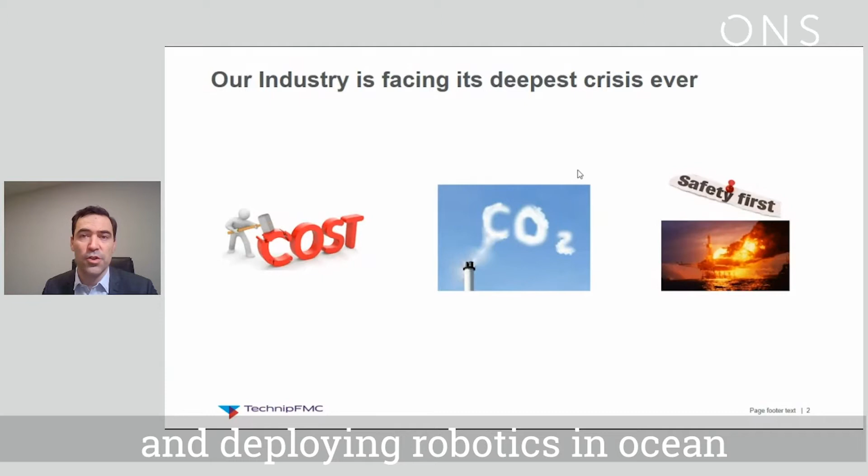We also saw that the pandemic highlighted how oil and gas production relies on human presence offshore. At Cybernetix, we've been developing and deploying robotics in ocean environments for the past 30 years, and we are convinced that robotics can be used to address these critical issues. In addition, the industry needs service providers able to bring the quality level that we require.

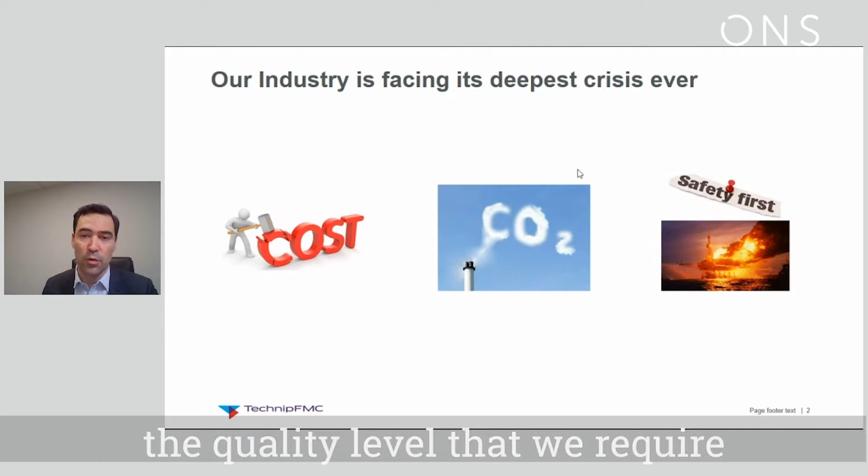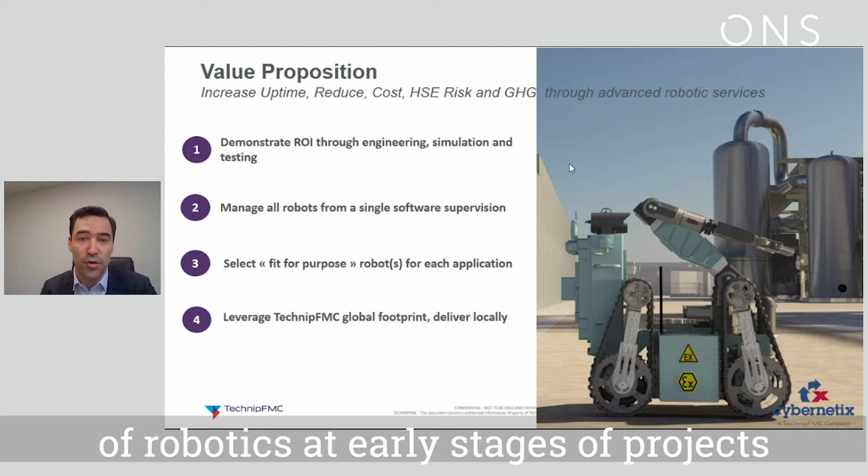At Cybernetix, our value proposition is to support our clients in enhancing the performance of their assets through advanced robotics. This value proposition relies on four pillars. First, we like to demonstrate the benefits of robotics at early stages of projects. We developed very specific engineering, simulation, and testing capabilities on that front.

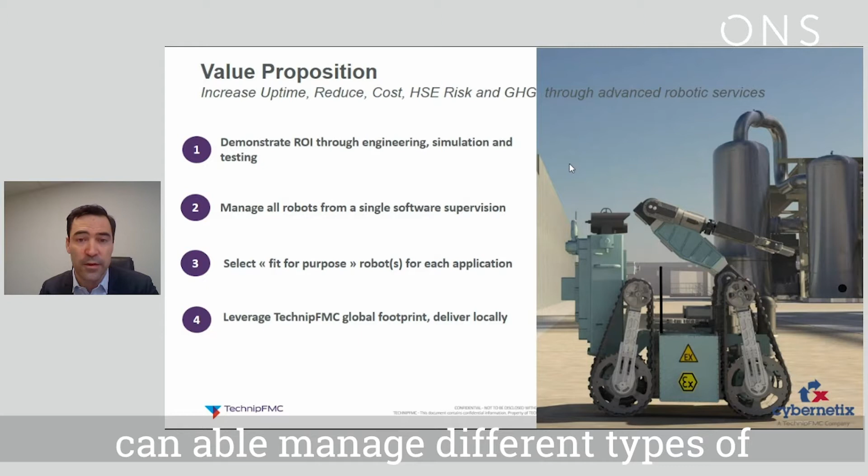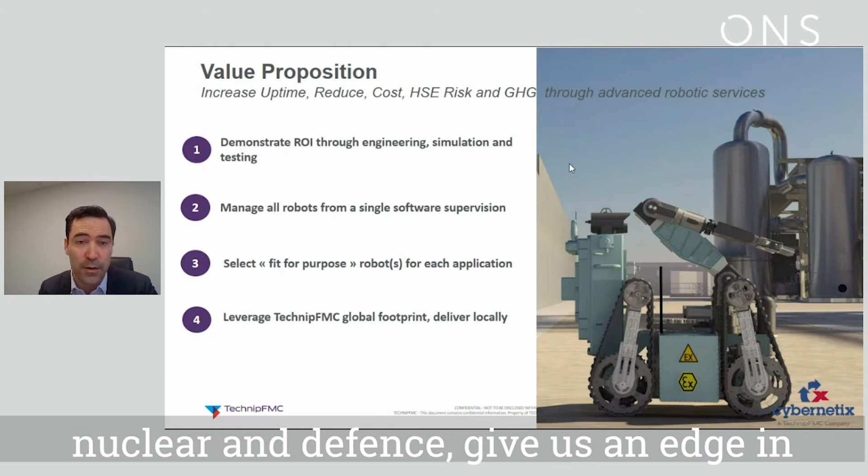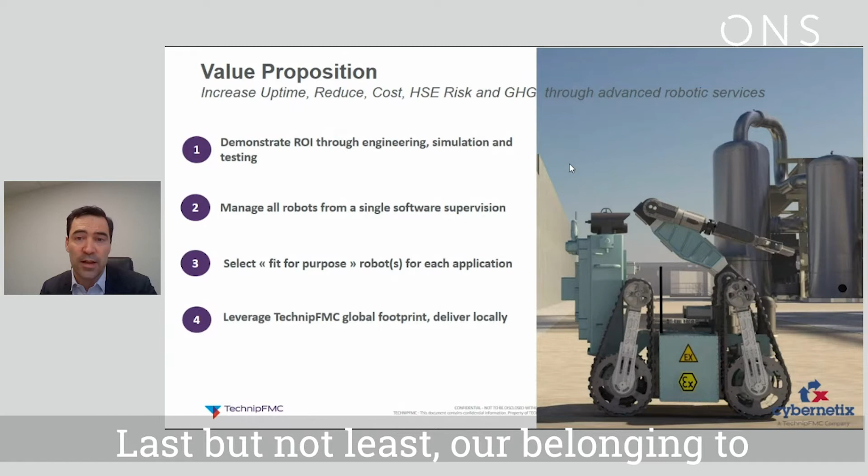We also developed internally our own software supervision over the past 15 years. This supervision can manage different types of robots depending on the applications. Our 35 years of experience in industries like oil and gas, but also nuclear and defense, give us an edge in selecting the right robots depending on your needs and applications. Last but not least, our belonging to TechnipFMC gives us a global footprint, which allows us to deliver locally to our clients.

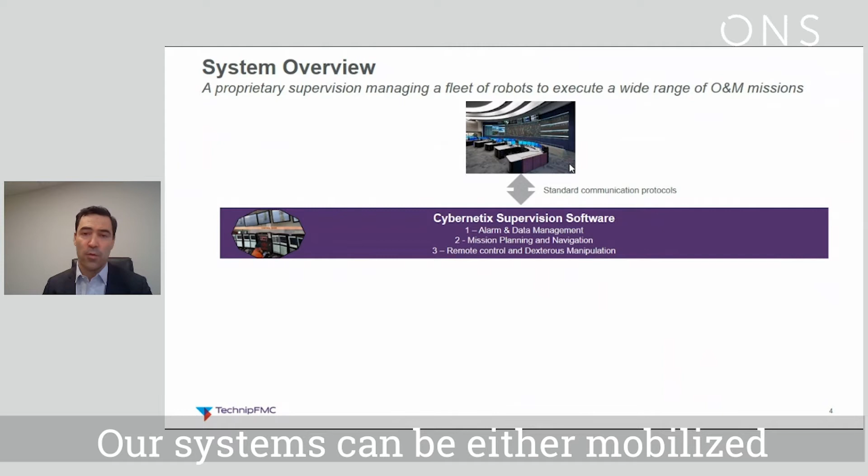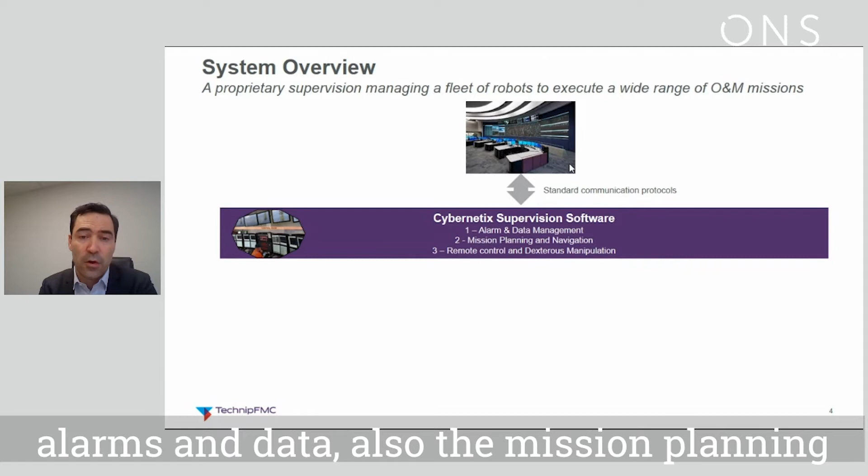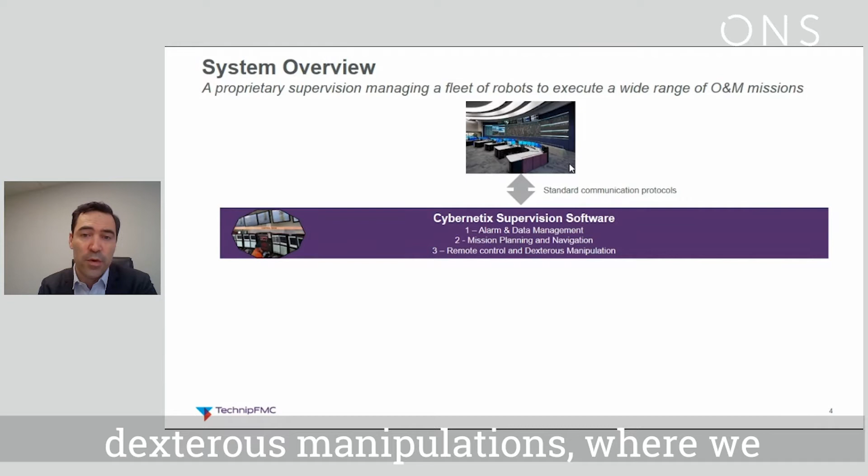Our systems can be either mobilized on a call-off basis or mobilized for longer permanent periods. The heart of the solution is our Supervision Software, which manages alarms and data, but also the mission planning and navigation of the different robots. It also enables remote control and dexterous manipulations, where we've developed very specific technologies for the nuclear industry. It complements a control center very well because we use standard communication protocols.

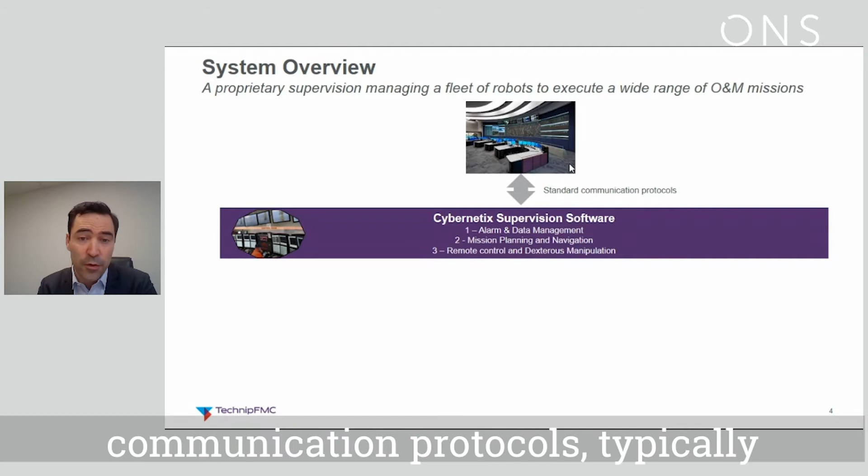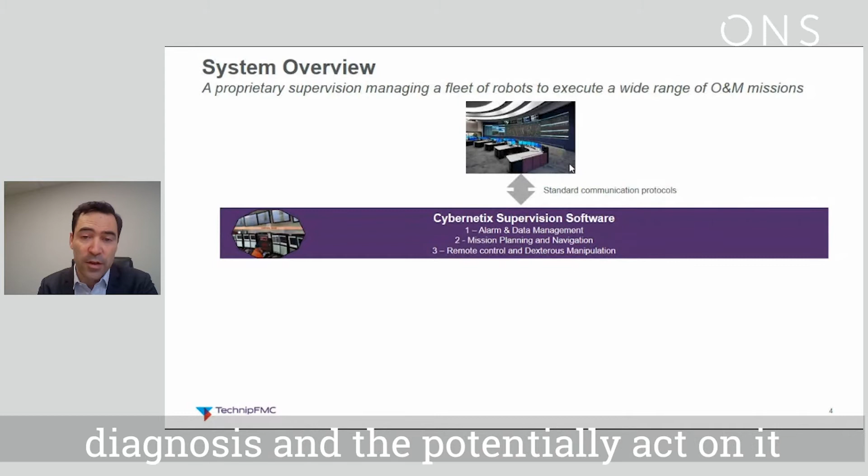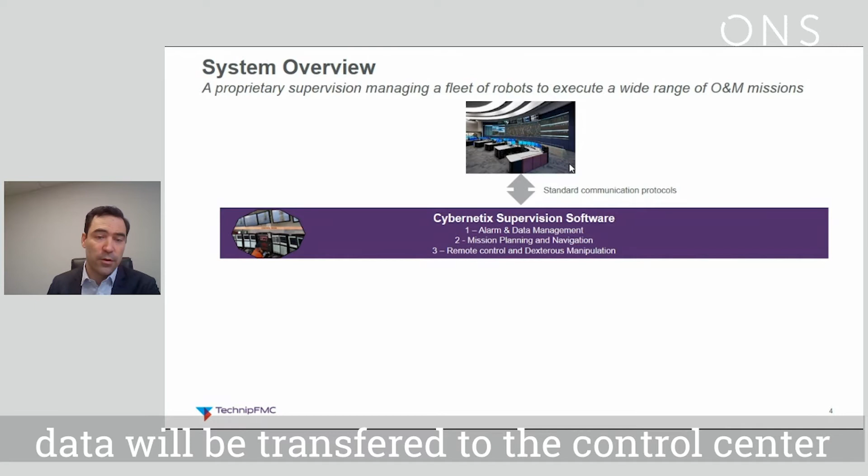Typically, if you have an alarm for a leak, the control center can share the alarm with the supervision software, which will trigger an inspection by a robot to validate the diagnosis and then potentially act on it. At the end of the mission, a report will be automatically generated, and the useful data will be transferred to the control center.

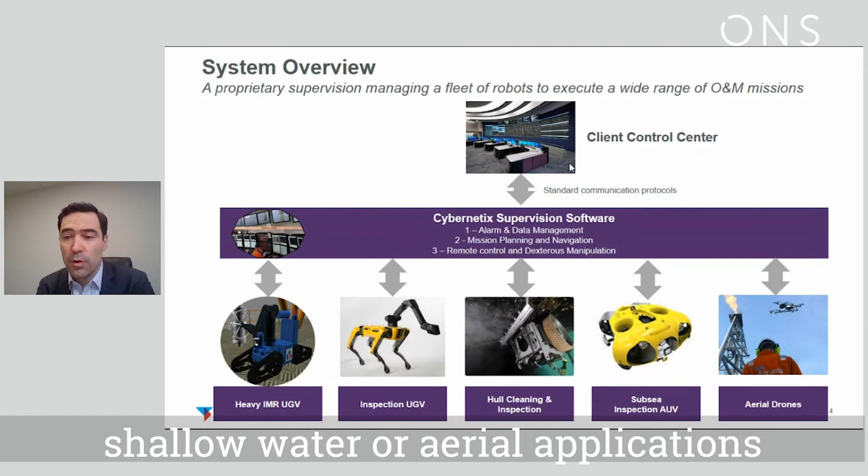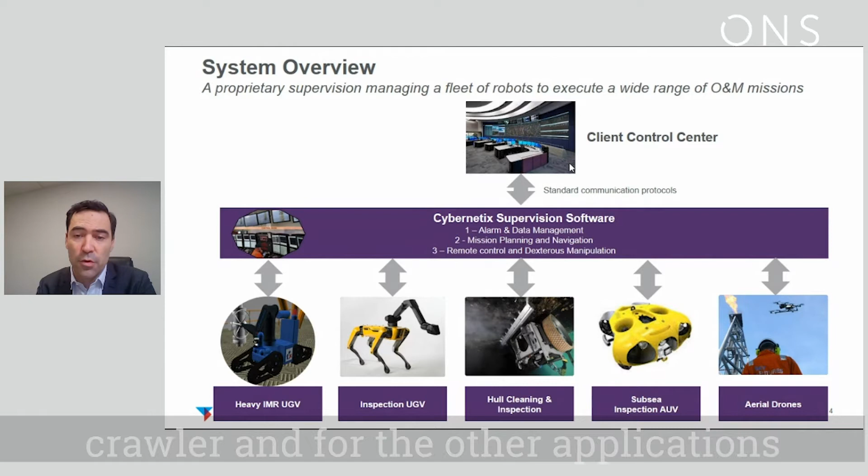We can connect any type of robot to the supervision system, be it for ground, shallow water, or aerial applications. We developed internally our own heavy IMR crawler, fully ATEX, as well as a hull cleaning and inspection crawler. For other applications, there are technologies in the market that we select depending on the applications and connect to our supervision platform.

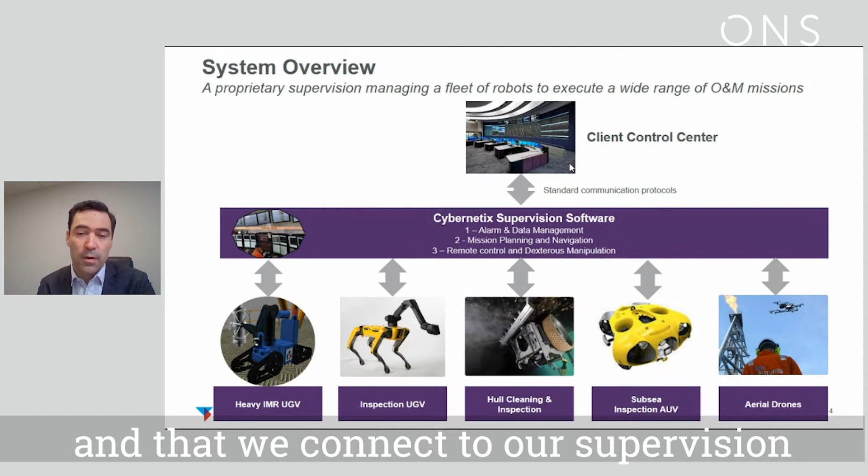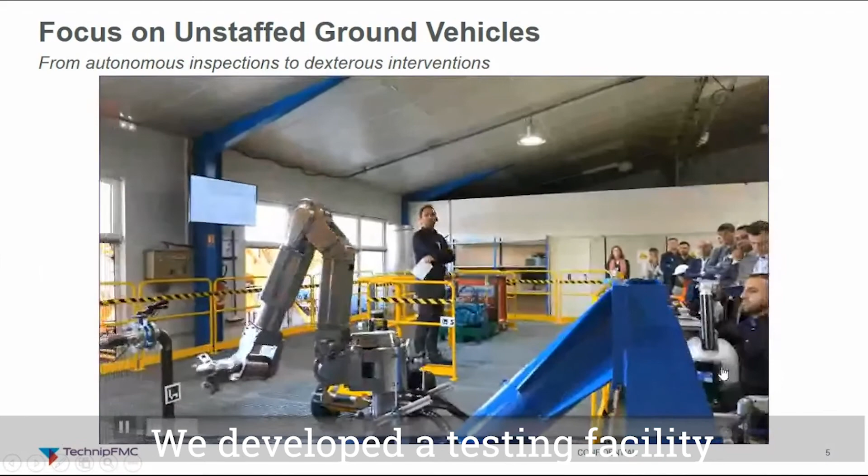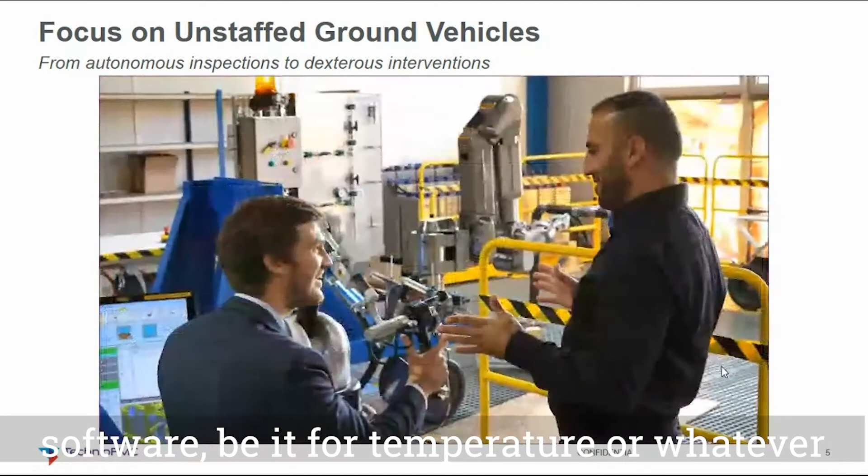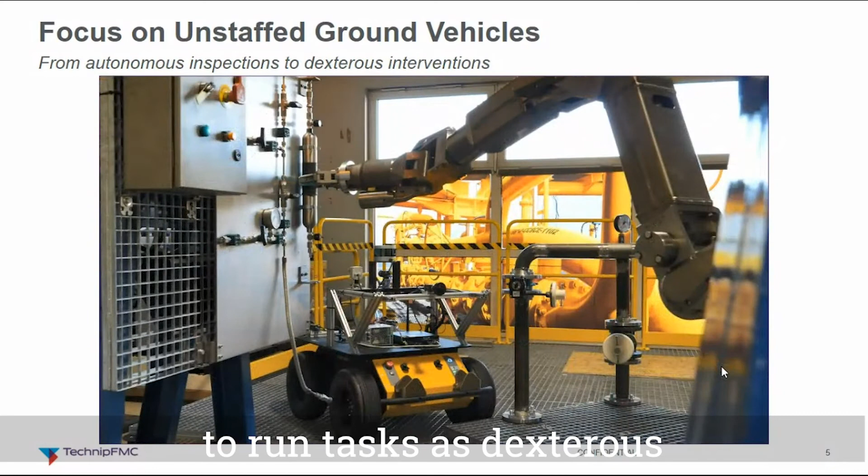So let's focus now on ground vehicles for a moment. In 2019, we organized an event where we demonstrated to clients our capabilities in terms of running autonomous inspections and dexterous interventions. We developed a testing facility, and now have an outdoor one as well, where we demonstrated our capabilities to run autonomous inspections through our software, be it for temperature or whatever needs to be checked. Clients also experienced our technologies in terms of dexterous manipulations, typically to run tasks as dexterous as gas sampling operations.

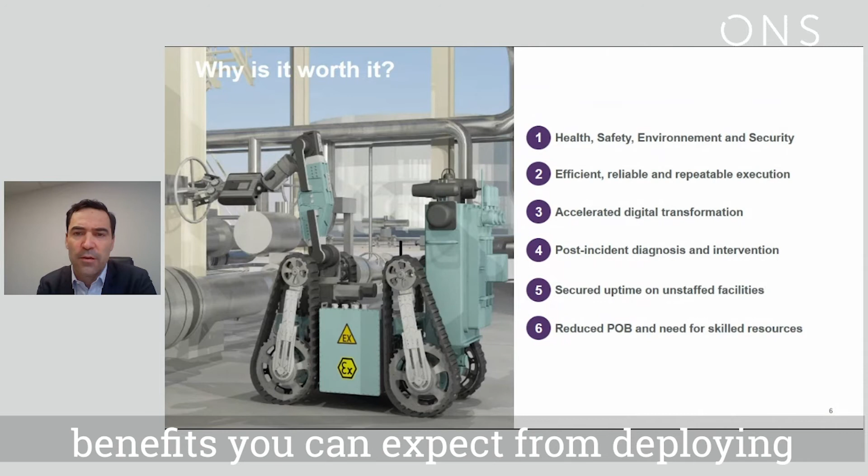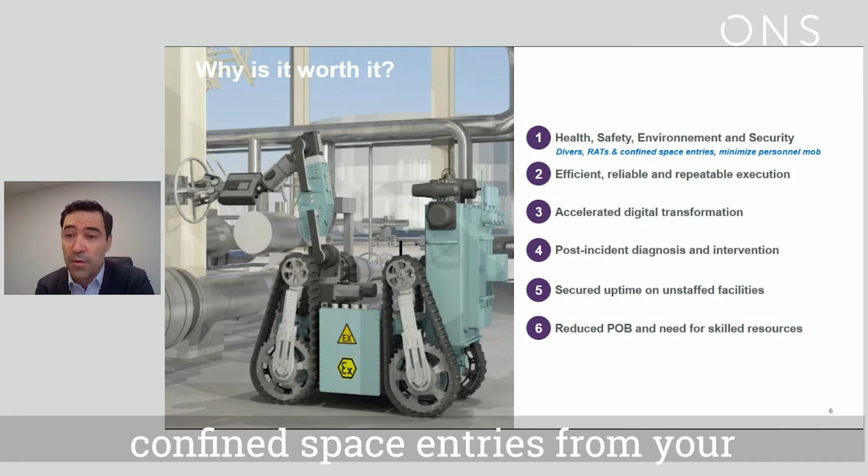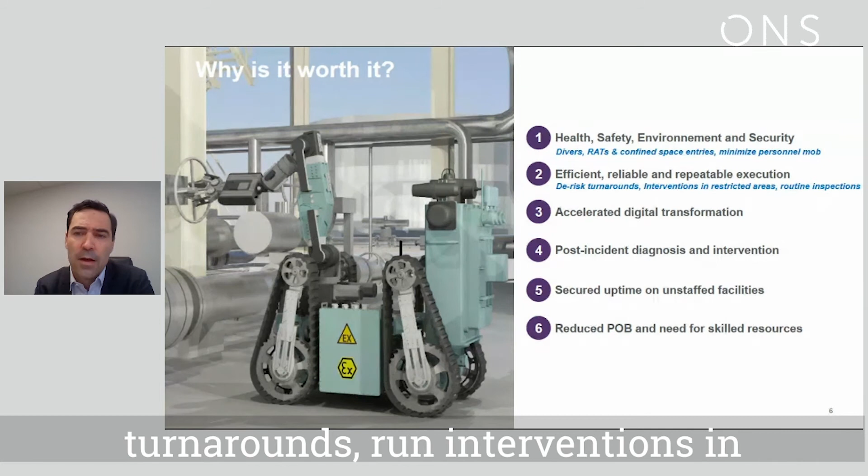So as a summary, what are the benefits you can expect from deploying robotics on your projects? First is obviously related to HSE: you can remove divers, rope access technicians, or confined space entries from your operations. You can run your operations in a more efficient, reliable, and repeatable manner. Typically, you can de-risk and shorten your turnarounds, run interventions in areas restricted to humans, or automate your routine inspections.

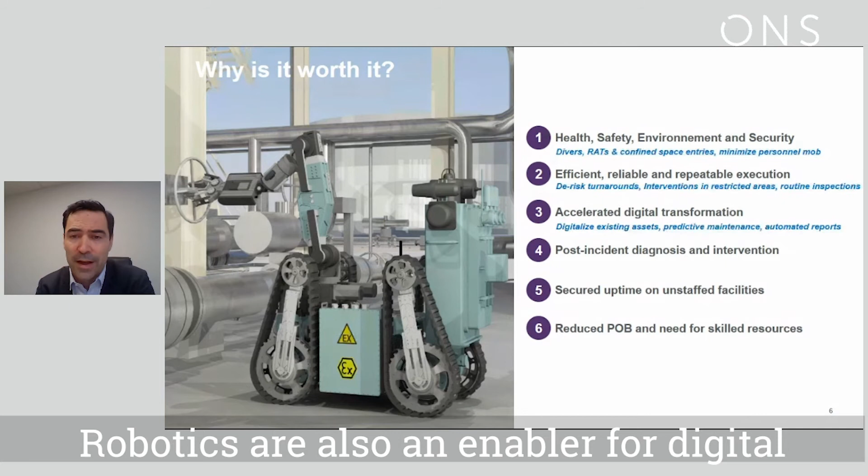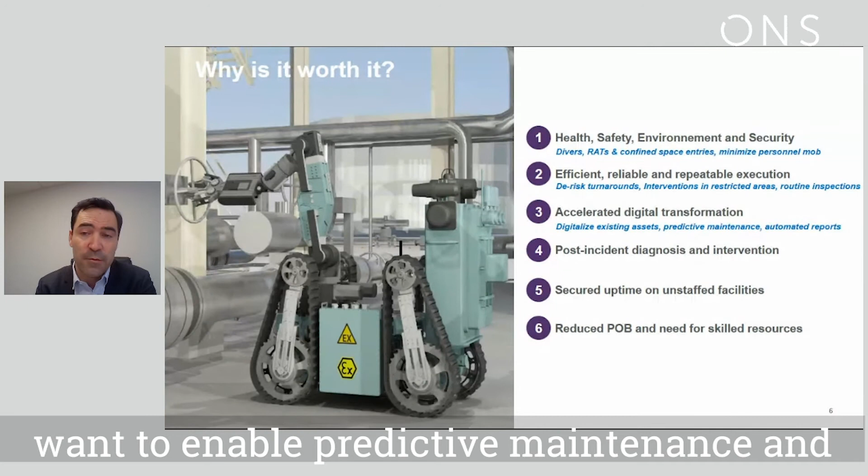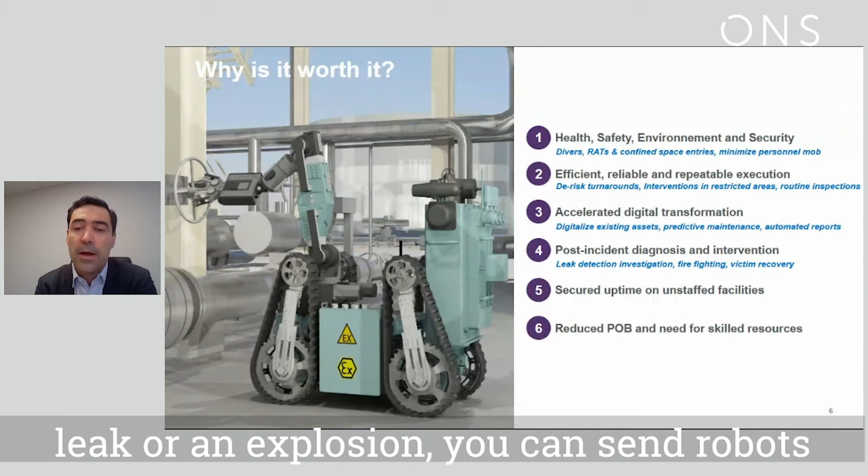Robotics are also an enabler for digital transformation. You can use them for digitalizing existing assets, typically where you may not have all the sensors you want, to enable predictive maintenance and automated reports. Post-incident intervention is also an area where robots can be very useful. Typically, if you have a leak or an explosion, you can send robots instead of sending people. Robots can be used for firefighting or even victim recovery.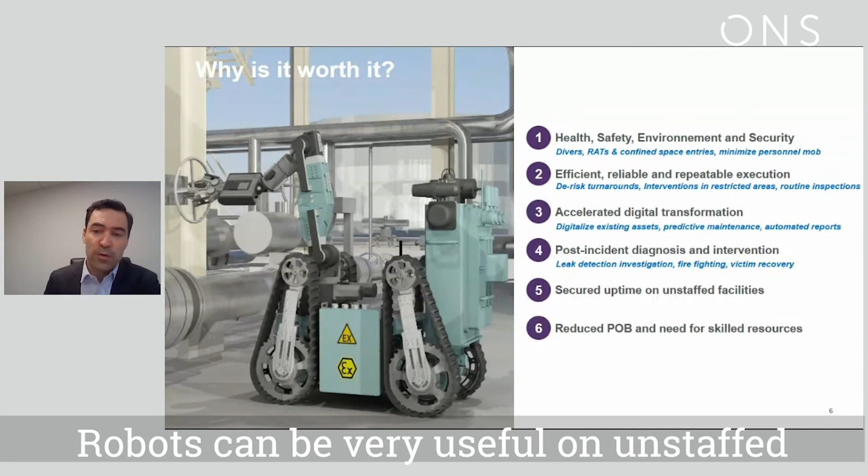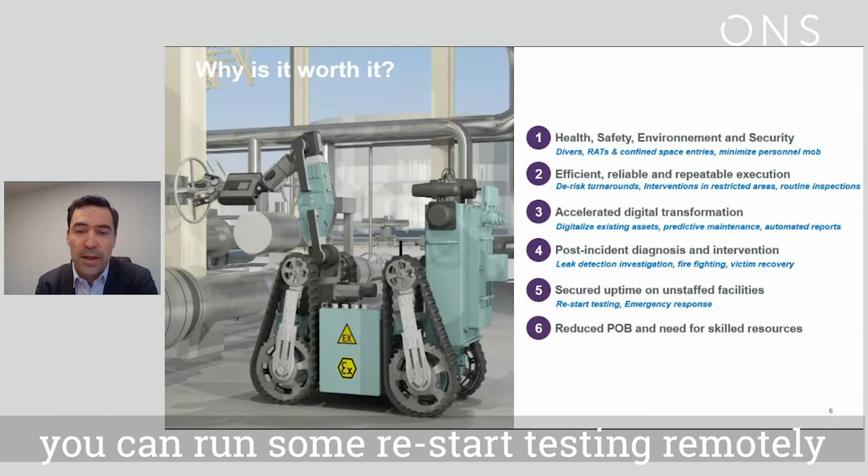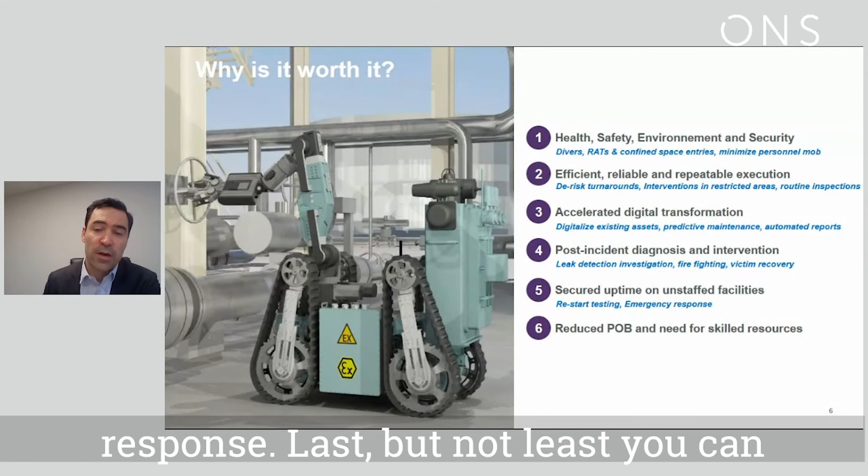Robots can also be very useful on unstaffed assets to secure your uptime. If you have an unplanned breakdown or shutdown, you can run restart testing remotely and understand what's going on, potentially restarting production. It's also very useful for emergency response. Last but not least, you can reduce your POB and need for skilled resources through remote control, reduce the frequency of human interventions offshore, better prepare them, and in some cases replace up to 100% of your personnel.

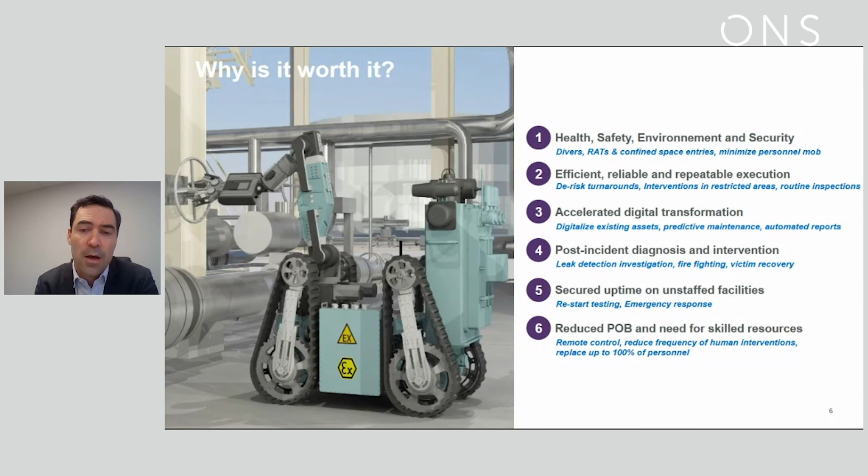There's a lot more to say about our solutions, our services, how we innovate, and how we can transform the way you approach your operations and maintenance activities. We can obviously not share everything with such a large audience. So if you're interested in running pilots, understanding more about our solution, if you have a very specific case, or would just like advice on how to run robotics projects, our team of passionate people will be very happy to help.